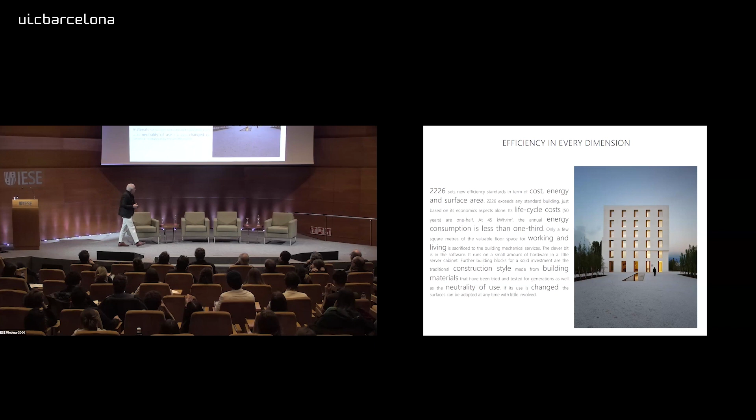And that's what we did, and we built it in 2013. How did we do it? I know I'm going much too slowly, but I want to go fast. Look, this is my understanding of the behavior of a building.

You see, in every building you have a blue line - this is the outside temperature over one year. Then there is a green line - this is the inside temperature based on the use of the building. Because, and that's very important to understand, you as a person do three things in a building.

First, you are a heater. Everybody heats about 100 watts per hour. So when the temperature rises in here, you are the heater. I'm really sorry - okay, I'm the heater, 100 watts.

Second, what is more interesting maybe - does somebody know how much carbon dioxide he, as a person, produces in one year only by breathing? Not by cars and other things, only by breathing.

Does somebody have an idea? Are there people who do sports? Those who do sports pollute a lot because they produce much more carbon dioxide, okay? But I can tell you, on average, you produce about 1 ton of carbon dioxide every year only by breathing. So, I'm sorry, we heat the rooms and we pollute the rooms. It's not somebody else, it's us who do this.

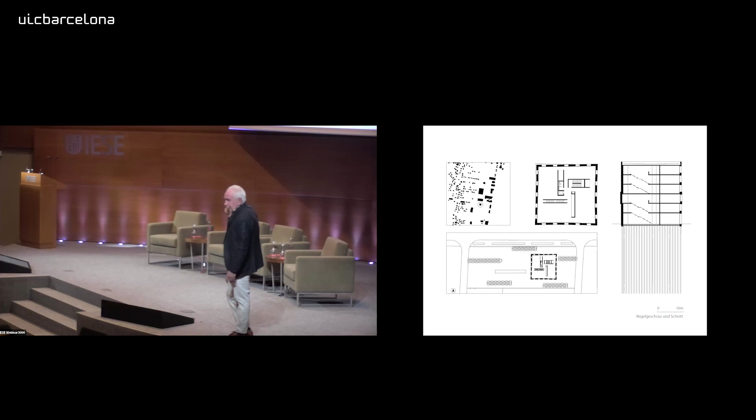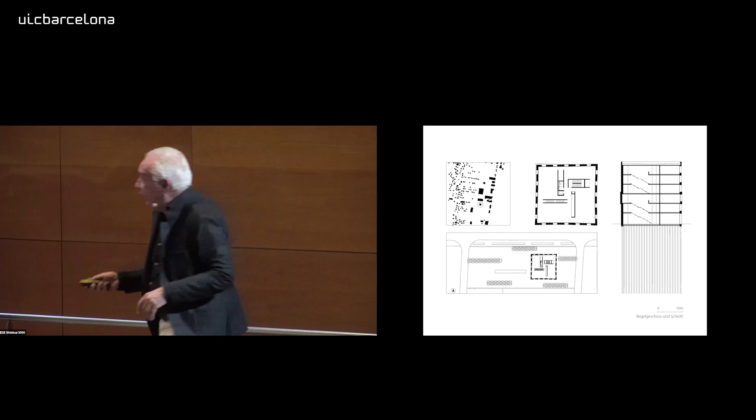And you know, this is the layout, and what you see in the layout is one of these principles, that you don't see what the rooms are used for. They are very open, and I'll tell you what is in the building nowadays. In the building there is, very fashionable, a yoga studio. Second, there is a fitness studio. Third, there is a graphic office. Fourth, there are software engineers. There is a canteen on the ground floor, there is an art exhibition, and there are regular architectural offices also, okay?

There's an apartment also, because I believe very much in this idea of an open building, which should be open for use according to the necessities of society. We have a big problem in every European country that our laws are completely against this, because our laws ask us to determine the use of the building according to zoning. But I'm very sure this will disappear quite soon, because nearly every intelligent person understands that this is stupidity out of the 20th century, so we will have to change it.

Okay, and that's what the building can do. The building has access to these flaps, window flaps, which will open and close. I don't want to show it now in technical details, but you don't have any irritation in winter, because then the angle of opening will be much smaller than in summer, so the infiltration takes much longer, and you don't feel anything.

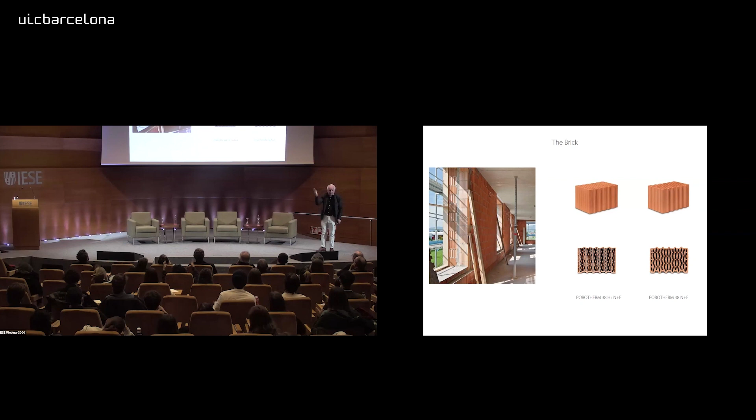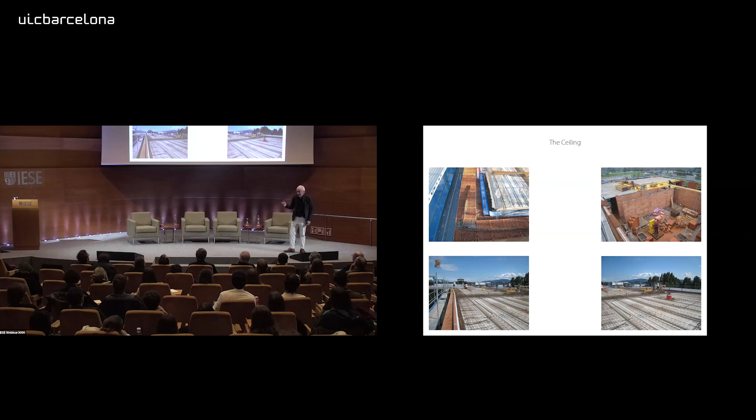Okay, I don't want to dwell on that. Now I'll show you very fast how the building is done. It's done in bricks, which is the most common material, very simple. As an architect, I had some principles: everything which is horizontal is concrete, everything which is vertical is brick. Nothing special. All floors are raised so that you can put water supply, wastewater, electricity and data to every point in the room. So I don't care what you do with this room afterwards, because you have access to every point with all the media in this building.

And that's how it looks like. You see there's an architectural hobby, so you don't see anything around the window. This is extremely complicated, I think the most expensive part of the building, how to manage the water in front of the window. But this was very important, though it's just architecture.

Okay, that's inside, that's inside. And I'll show you the atmospheres inside the building.

Okay, this is only a personal hobby. In the valley I come from, there are the best carpenters for massive wood, and I do everything I can when I can afford it—they're very expensive to do everything out of massive wood. I like very much these standard office tables in the office; they are 4.25 meters long and have no screws, no nails, nothing. It's all about pressing, all about knowledge of how to deal with wood. That's a little bit my thinking, what I would like to have also in architecture. When you think long enough about the things you use, you find out that they are much more intelligent and have much more opportunities than you have.

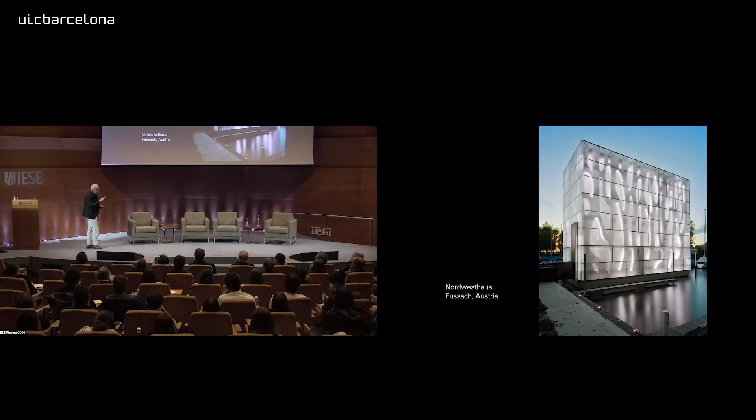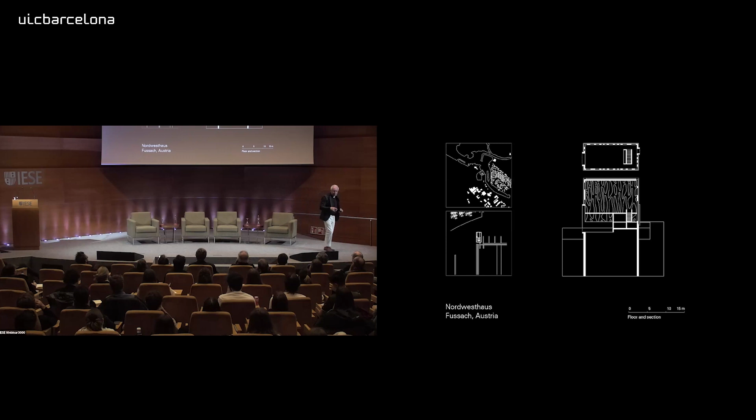This is another important building for me personally, even older. I have a client who is a woman, who has a small harbor at the Lake of Constance. Every autumn she came to me and said, I earned a little bit of money, what do we build this year? So I did 7 projects with her, and this was one. But according to this very close relation with the client, this was the first project in my life where I dared to do no technology at all. This building is not usable 360 days a year, maybe about 320. It's a toilet with a meeting room.

This is something I like a lot—that in our area we have so wonderful craftsmen. Because when you don't have very good craftsmen, you cannot do something like this. And when you would ask for a price, it's complicated, but with this craftsman we could do this.

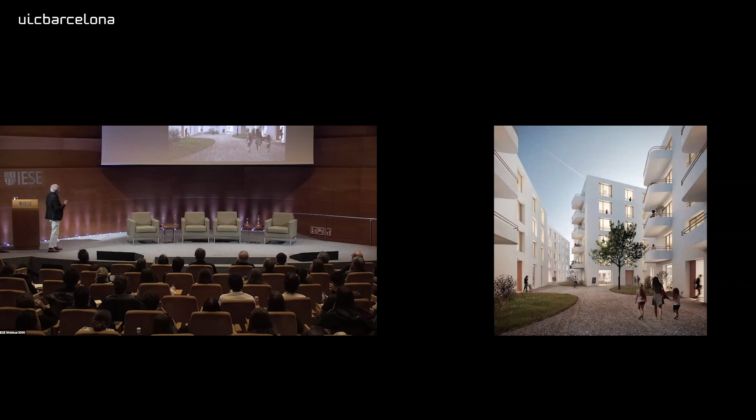Now we do social housing. This is already built—social housing, no techniques anymore, nothing, and it's in use. This is all very small. This one is in Zurich, nearly finished, opening in September, about 27,000 square meters of this kind. And we also do—this is what I like a lot—an office building for one of these cantons in Switzerland, for government, even bigger than this one. In the opening speech of the construction site, they told us, we want to show our people and our industries and our companies how the future will be. They believe very much in this because it has such objective advantages.

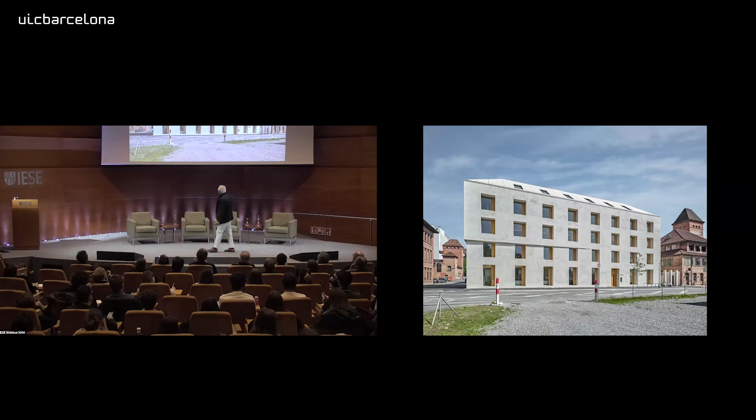This is in Geneva, I'm sorry—this is in Lucerne, there's a school in there. It's very nice to renovate old buildings with this approach, because old buildings done before modernism are perfect for it. Looking at this city, there are a lot of old buildings you could renovate very easily this way. Okay, I'll go for it—this is a worker building from the year 1908, in a worker district, so everything was very poor, and they only had 36 centimeters of brick as a wall.

We did not do anything with the wall. We did not do any insulation, nothing. We only changed the windows and implemented software, and we insulated the roof. That's all what we did.

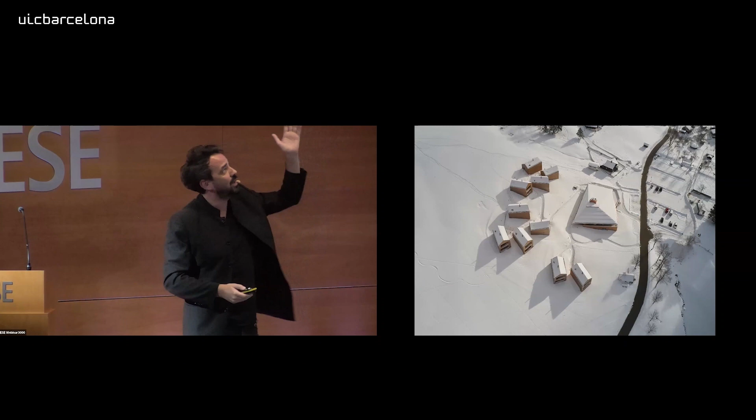This is, in my opinion, the story of this company, related to some experiments done in Vorarlberg that amazed people. It spread and was repeated at other scales all over the world. That's how I understand it, and I'm very proud to have had the chance to experience this kind of small, high-quality project, and also to bring these ideas to other places in the world, to China, to the east of Europe, etc. You see these very nice chalets.

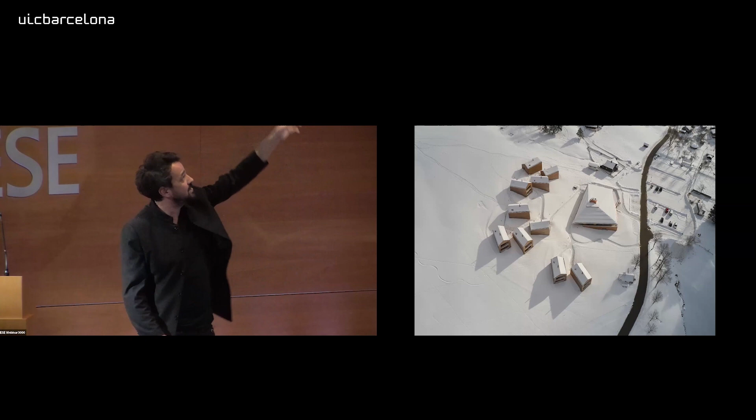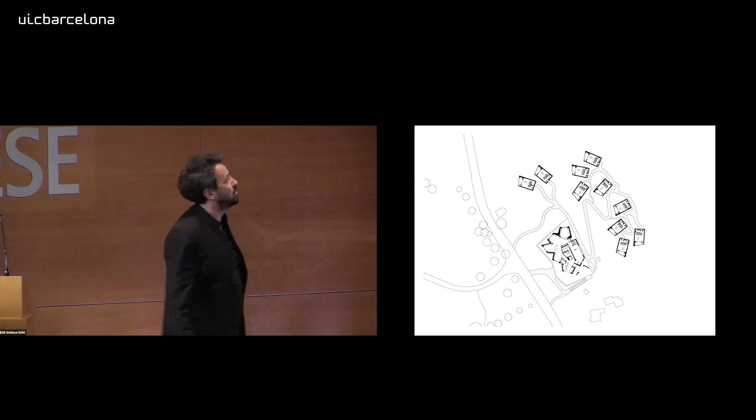You see the restaurant, the big space you have in the middle, covered with this roof. Of course, you can explain a lot of romantic things about it. This is kind of an explosion of view, these restaurants, and you have these chalets which are placed following the topography, etc.

So I think at the end one can say something, and I'm developing ideas that he's saying. He was talking about doing buildings for the next 200 or 300 years. I don't mind if you are ambitious, you can say something like this. And he was talking about flexibility, because the function can change, buildings should be sustainable, because no one wants to pay to maintain expensive buildings.

The most important thing you should always remember as an architect is to do beautiful things. It sounds maybe very banal, but beautiful things which end up having big acceptance from the people, from whoever sees them, tend to survive for much longer periods than other buildings that are hated and ugly. So even if it sounds strange, if as an architect you feel lost and don't know how to go on with sustainability, just do a nice building, and maybe this is the highest contribution to the environment.

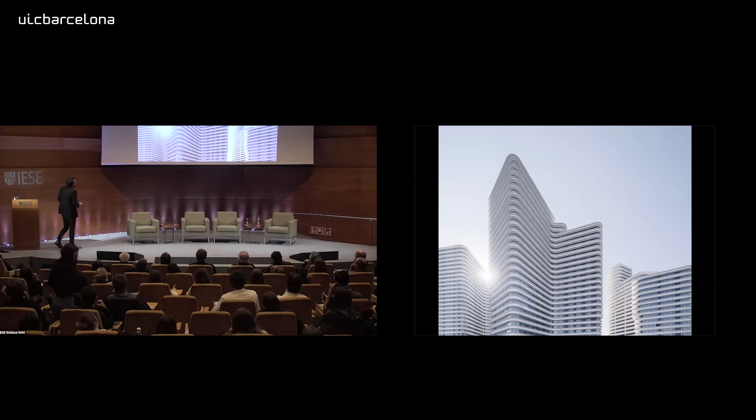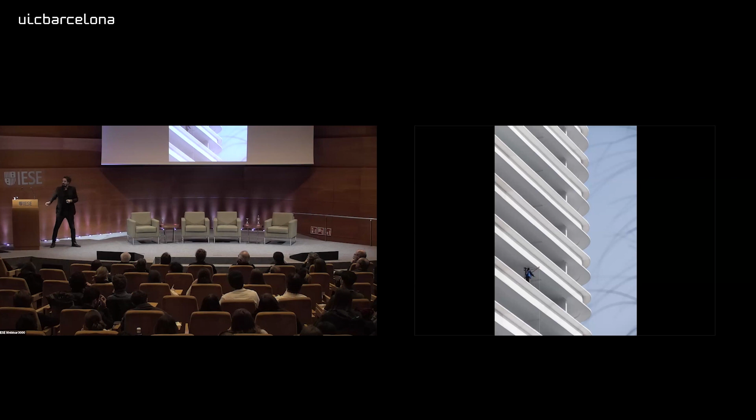But in China, we found the way of doing it as abstract as possible. As you see, there are no gaps at all. This is unthinkable in Europe, and it's a perverse story that is really not nice to say—they are painting the building all the time. This is cast concrete on site, and they hire, it's really unbelievable, people painting it white constantly, all around the building. This is the only way you can get this super abstract feeling at these dimensions.

These are not renderings, these are real pictures of a building. If you think it's a render, it's just because you see nowhere gaps in these horizontal elements. I know it might be a little too much and childish, but this ambition of doing abstract stuff that looks really like a 3D model, and bringing it to this point, I find it actually a little perverse, but also kind of attractive.

For example, if you talk about a sustainable building, it is much more easy to say that a sustainable building is something which looks like a tree. This sounds absurd, but it is really like this. So if I have to say that a building is sustainable, it is much more easy to say that the building is made out of wood, that the building is green, that the building is something light.

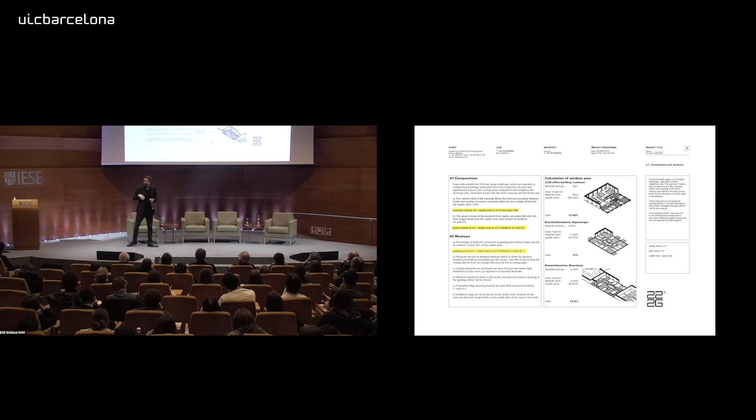And what's more, I repeat myself, but always please think about facts. 10 days ago I was doing a housing building, and yeah, it is very efficient - 8 apartments per level in a tower.

Then Mr. Eberle came to me and said, is this an efficient building? And I said, yeah, it's very efficient. And then I started to talk ideas: it's very efficient because it's 8 apartments per level, it's a tower, and it's very compact. He said, no, give me the numbers, give me the facts. And then we started calculating.

We started calculating the area in relation to the non-usable area, the corridor. We calculated the perimeter, the facade in relation to this area. Then we got to a number, and this was the satisfactory explanation - the facts, not the ideas of how compact or what the imagination was, made out of wood, etc.

I really encourage you to be passionate about the facts, about not being seduced by ideas - there are a lot of attractive ideas, but the truth doesn't need to be related to how attractive an idea is. Especially when it's related to sustainability, I think there are a lot of ideas which are easier to sell than the ideas that might actually be true. That's the statement in this relation.

About the future a little bit - this is a huge building we are developing, using 22, 26 as a key issue, but you see that from the very beginning we are focusing here into doing a really compact building. The span of the buildings is around 18 meters, these are the modules we are repeating all over. It is as compact as possible.

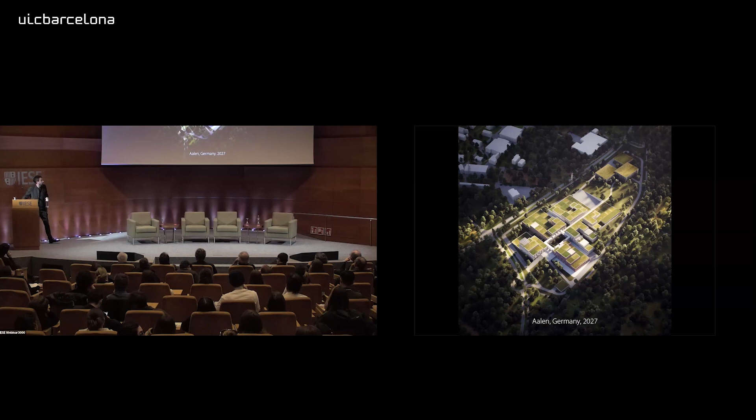Of course, there are a lot of things here, like when you build in the middle of nowhere, it's very important that you generate an identity. A little bit like in the Chinese project, we are generating a heart in the middle of the development so that all the buildings have a point of orientation. It's not just placing boxes nowhere, but generating an identity in the very middle for the overall development, as you see here.

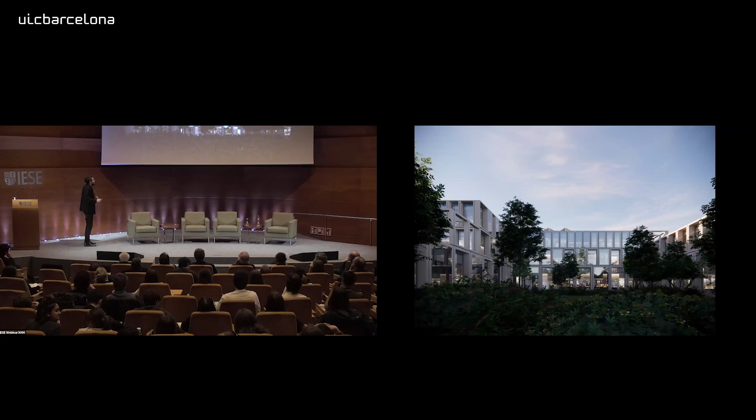Now we are testing, this is what I'm doing right now with my team. We are trying to test different facades and different appearances of this. I'll come back to this 22, 26, because of course, once more, one cannot just stay—

It would be contradictory what I say, but one cannot just stay in these hard, super strict principles. At the end, it's about doing very human architecture. I really find this challenge amazing, that when we go to the big scale, like we are doing here, big scale, especially in this super big scale, because this is over 100,000 square meters.

You have to think carefully about repetition. You have to have elements, of course. You have to have modules that you are going to use. It is a must that you repeat these elements in order to make this kind of composition. You have to have a very regular structure, a very regular facade. You have to repeat elements.

It has to be like this because of the cost and because of a lot of reasons when you work at this huge scale. And I really see the goal, and this might be a very personal way—what I try to do in the last years is how to make the big scale human, but not giving up with this repetition of modules and with being standardized.

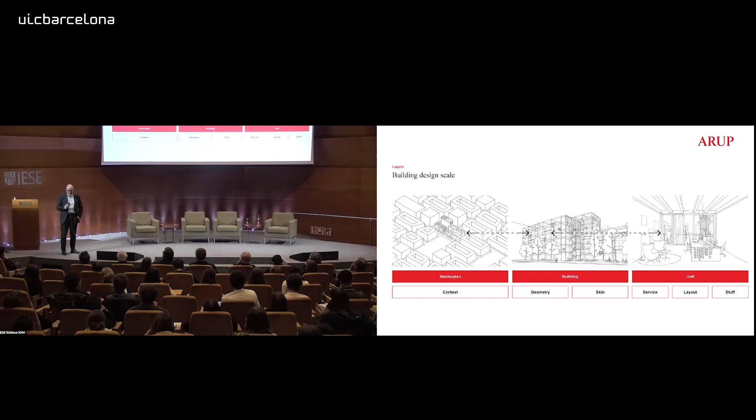Well, after that, I'm going to give you our formula. Okay, it's not a formula, it's just like - oh gosh, I don't know how to translate that - the 10 commandments in the Catholic religion. So these are our 6 commandments, okay? Just 6. The main points that we think we should apply, and can apply, to anything we do as architects, engineers, or consultants.

Improve human health and well-being, okay? Transition to a zero carbon economy, sounds good. Adopt circular economy principles - there's a little more thinking down there, we'll see it in a minute. Enhance community resilience - this is a new word, we have to understand what that means. Create social value, sounds good. And finally, respect planetary boundaries. There's nothing strange there, it all sounds very reasonable.

The problem with these commandments is that you read them and they all sound fine, like in the Catholic religion. The problem is how you put them in place every day. And of course, the understanding of the commandments varies with the context, with the conditions. But still, it's good to have at least some principles. And these are now our principles as a firm.

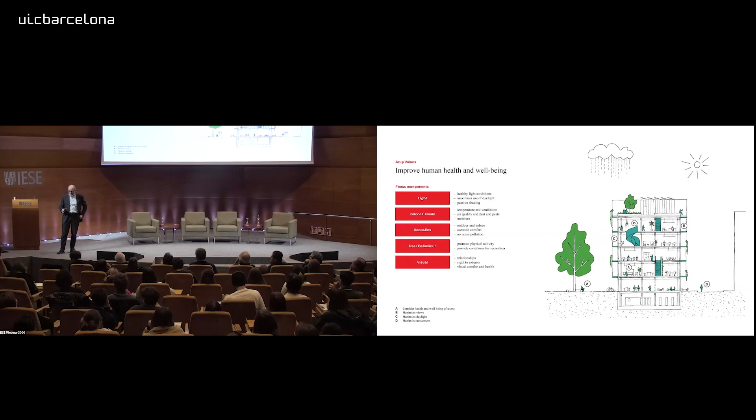So this gives us some recipes, and again, I warn you against recipes, because recipes are good, but then you have to change them, okay? It's not the same cooking with a Thermomix as cooking with a similar robot you bought in Lidl - they don't work the same. You have to adjust something. Same here, so beware of recipes, but we have our recipes as well.

Let's move now to the other one, which was circular economy. This is something we speak a lot about these days, and it's an idea in the air. We tend to complicate ourselves a lot, but I think this is a very good summary of what circular economy means in the built environment.

You can say it means four things. One, design for long duration. Wonderful, another point of agreement. That's where we totally agree. If your building lasts not more than 100 years, you're not doing things right.

Okay, aim for long. But then there's a second thing: should everything in a building last 100 years? No, you can't have glass lasting more than 40 or 35 years. That's the reality. You can't have a gasket or a part of a service lasting forever. Their life cycle cost on the life cycle of different elements is different, so we have to use the duration of elements in a clever way. It's not as simple as saying everything will last 200 years, because many times we can't afford to build for 200 years. So there are limits to this idea, and that's when the complexities start.

Design to minimize resource use and avoid waste. Fantastic, we all agree with this as a principle, no issue with it. It's difficult, and that's what we have to do. To be honest, we are a disaster right now. In the Western world, we create waste like crazy. I'm speaking about our work, built environment, not about consumption in food, etc.